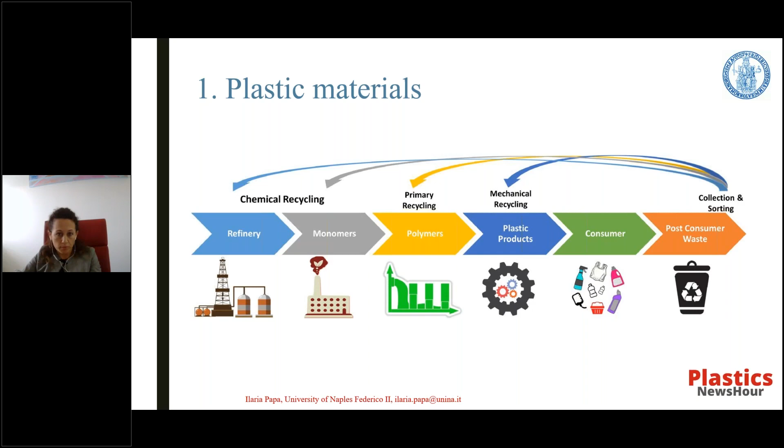Among the synthetic bio-based polymers, a special place is undoubtedly reserved for polylactic acid, or PLA, which in recent years has aroused the interest of a lot of researchers, becoming the subject of thousands of publications available in the literature. PLA, as you know, is one of the most widely used bioplastics, but its intrinsic characteristics, such as fragility, often limit its use in particularly demanding applications unless strategies such as mixing with other polymers or the inclusion of suitable additives are taken into consideration. With this approach, new environmentally sustainable materials with adequate performance, ensuring the reduction of environmental contamination associated with plastic, are produced by industry, but also by a lot of researchers.

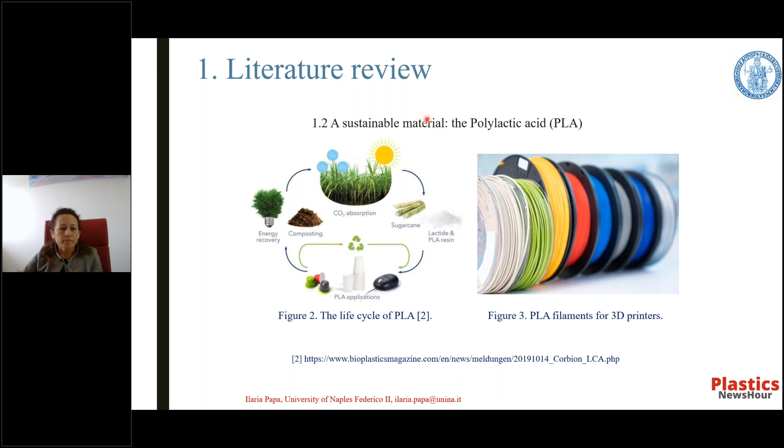The most common technologies to transform thermoplastic-based green composites on an industrial scale are extrusion, compression molding, and injection molding, and the success of these processes depends on perfect knowledge of the chemical and physical transformations undergone by the raw materials, and it often does not exclude the use of specific preliminary treatments or subsequent finishing processes of the parts produced, both costly in terms of time and expense, and which often result in the accumulation of production waste.

So the technological challenges that can arise from the use of alternative and more sustainable materials can be alleviated by a more rational use of the same, as well as by the elimination of additional post-treatment steps, thanks to the use of additive technology that you can see in the slide.

Among the latter, fused deposition modeling, or FDM, is the most common approach for processing thermoplastic formulations. In practice, the process involves a filament of a thermoplastic material, which is heated and passes through a nozzle to be deposited according, of course, to a preset code onto a plate, a different material that we can see in the second part of the presentation.

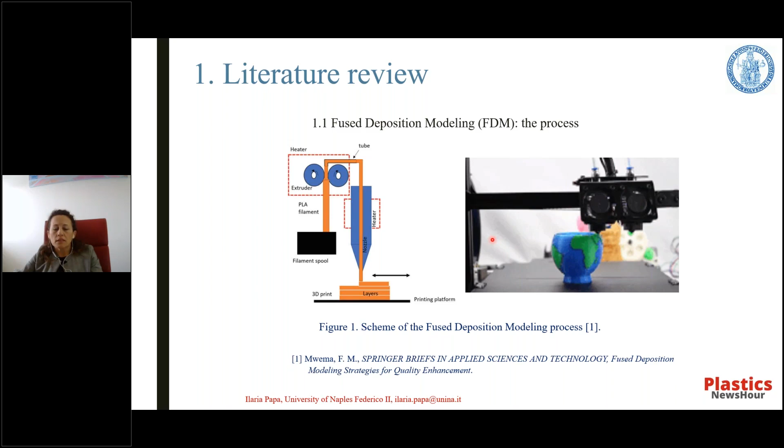So that said, taking into account that the raw materials for the production of filaments are still mainly of petrochemical origin, also in this case there is a growing interest in biocomposites, for example in the potential of alternative filaments based on green matrices, perhaps modified by the inclusion of natural additives, for example reinforcements, as I said before, such as vegetable fibers or agri-food waste. To overcome the inevitable environmental impact generated by traditional plastic waste, which often cannot be recycled, in recent decades a growing interest has also been directed to the study of bioplastic materials.

Of course, in literature, many studies have investigated the mechanical properties of PLA parts manufactured by different technologies, but also by FDM, given the high know-how on PLA, but only few studies have investigated the energy consumption during the FDM process. So a part of this talk is about understanding how to optimize the process parameters to obtain good mechanical properties of PLA parts while minimizing the energy consumption during the FDM process.

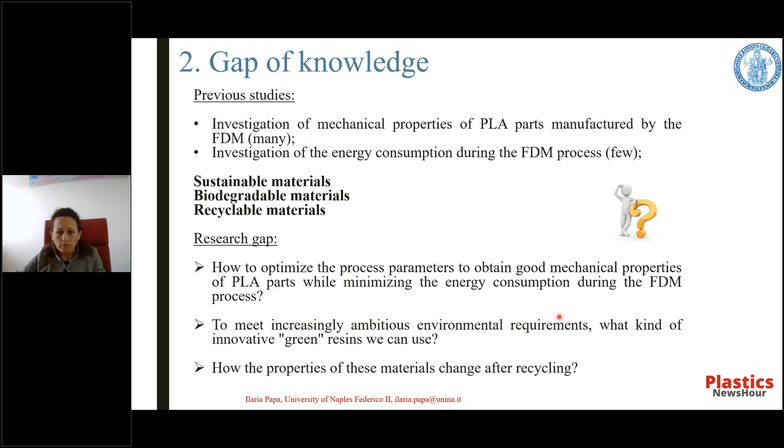Another part is about meeting increasingly ambitious environmental requirements, and so what kind of innovative green resin we can use and how the properties of these materials can change after recycling. So let's start to discuss sustainable materials and energy consumption.

Currently, the large use of 3D printers raises some issues when considering the environmental impact of home activities. A sustainability perspective suggests developing new ways of 3D printing parts in an energy-saving approach. In a previous research study, it was observed that the greatest contribution in terms of energy consumption is given by the heating of the plate and the continuous cycles to keep it warm. As a matter of fact, the power spent to heat the plate is at least 16% of the total power demanded by the machine.

And for the conventional plate made of steel, the thermal dispersion forces the system to keep the power on for the whole printing cycle, because the bed has difficulties reaching the target value, in particular when it is too high with respect to the room temperature. So in this scenario, the design of the plate was considered crucial to pursue energy consumption reduction in large-scale device use.

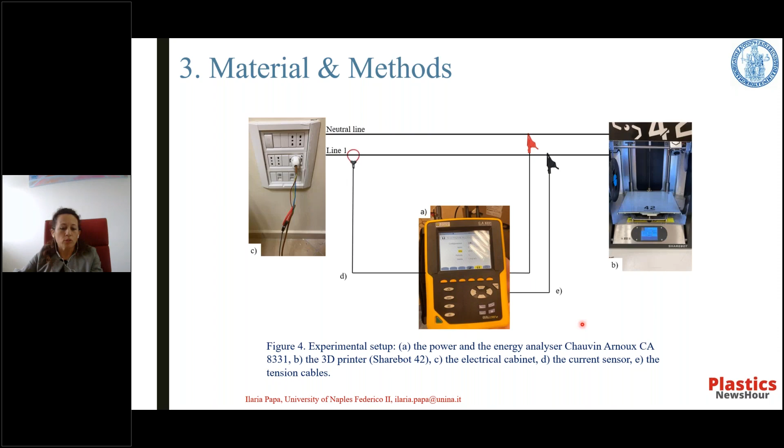An important thing that I have to say is that all the samples were printed using both an aluminum plate and a steel plate, to compare the results obtained and to study the effect on the mechanical properties, but also on the energy consumption.

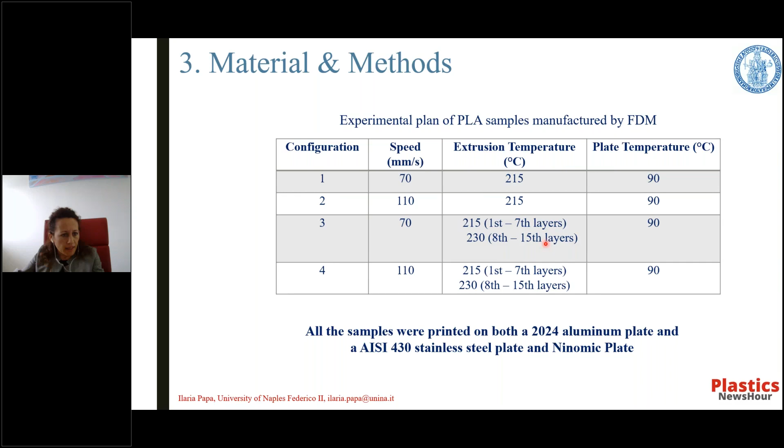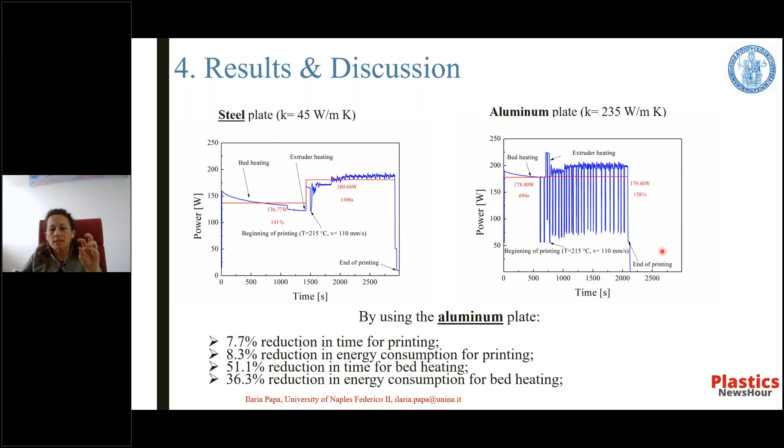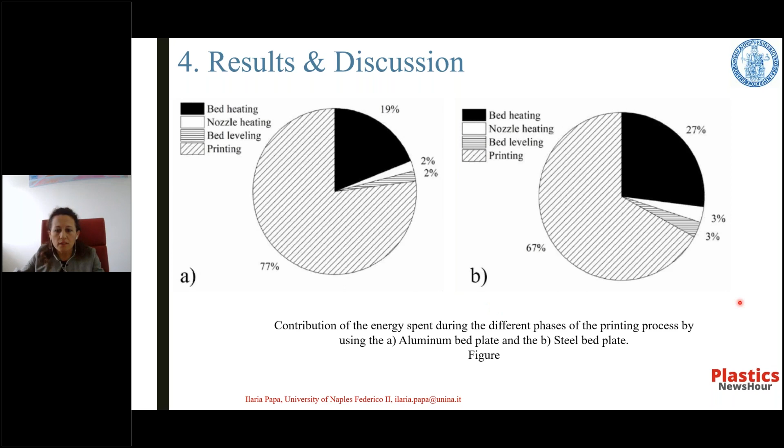Nevertheless, the printing time is independent from the capacity to reach and keep the target temperature, because it depends just on the nozzle speed. So the significant difference reported in the energy spent is even more important, since it means that although the duration of each phase doesn't change, the energy spent is improved. This is due to the numerous on-off heating cycles during the printing phase that we have seen in the previous graphs, where the signal goes up and down. This phenomenon indicates that the 3D printer continuously requires energy to maintain the steel plate at 90 degrees, differently from the aluminum plate, according to their different thermal properties.

Thus, in this part of the research, we have noted that it's better to use an aluminum plate for desktop 3D printers rather than steel plates, to reduce power and energy consumption of the FDM process, and this fact is related to the conductivity of the material, of course.

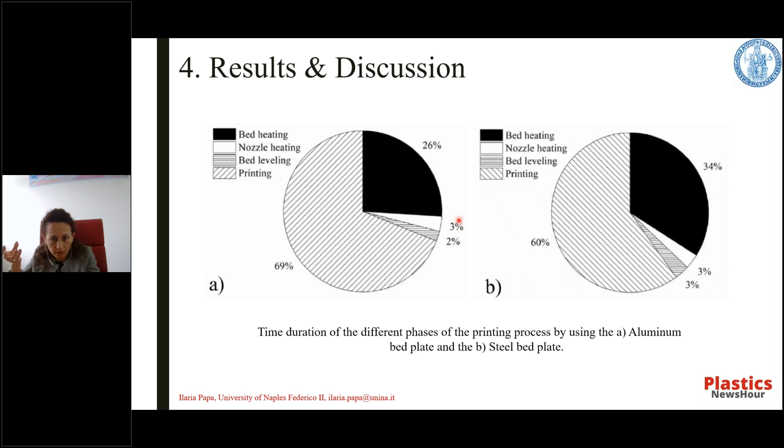From the values resulting from the energy consumption analysis, an analysis of the specific energy consumption, or SEC, was performed, which is widely used in the literature as a key sustainability performance indicator. In particular, in the FDM process, SEC represents the energy consumption for printing the mass unit. There exists a linear correlation between the SEC and the printing time, as expected, and so a new efficiency index, given by the ratio between UTS, the tensile strength of the printed component, and SEC, was evaluated. The index explains numerically how much tensile strength is obtained per unit of specific energy consumption. A higher value of this ratio indicates a better process efficiency for the printing strategy.

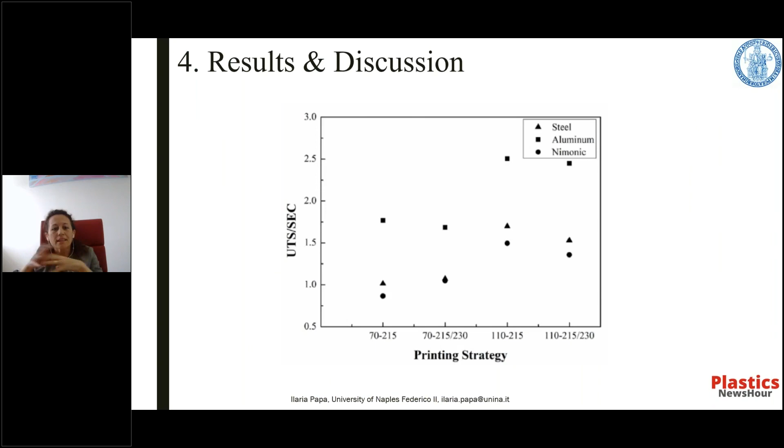The topic that we have discussed regards the technological and environmental sustainability of 3D printers, which is very important for industrial application in a sustainable perspective and energy efficiency.

So we have studied and evaluated, to define a correspondence between the main FDM process conditions and the efficiencies of this technology, evaluating its performance in terms of both quality and energy consumption.

The effect of different printing plates and different materials on the energy consumption in the FDM process correlated to the quality of the parts has been investigated. We can say that the average power during printing is lower using aluminum plates than steel plates, and this allows saving energy during the printing subphase of the FDM process.

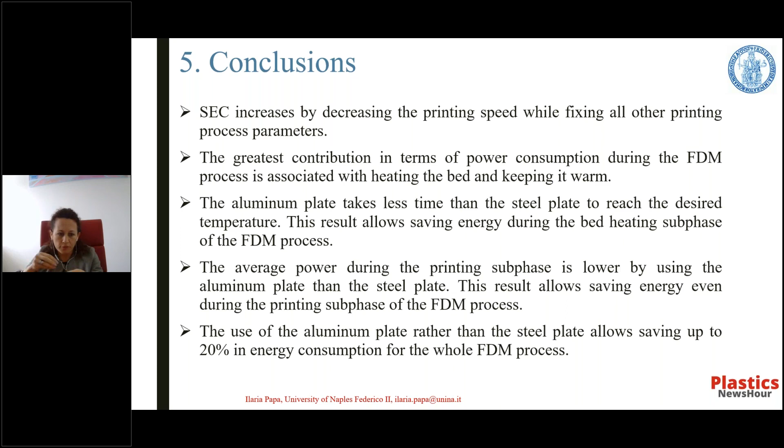So that finishes the first part of our discussion, but we can now start to discuss biodegradable and green materials.

As I said before, plastics that are natural or derived from renewable resources have attracted great attention, as they do not contribute to depletion of fossil resources and ensure reduced production of carbon dioxide during synthesis and transformation, therefore generating a lower environmental impact than conventional ones derived from petroleum.

In this context, with the aim to meet increasingly ambitious environmental requirements, special interest has been devoted to different green resins, many of which are already widespread even in different industrial fields.

Specifically, the implementation of dedicated chemical or physical modifications has allowed successfully overcoming new challenges, essentially due to expected lower thermal stability and also inferior mechanical performance with respect to conventional petrochemical polymers.

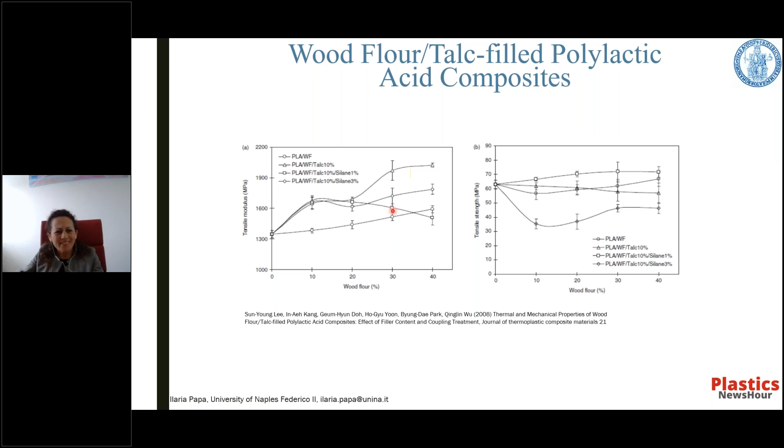Other researchers note that the cost of mixing PLA with synthetic macromolecules is high, and therefore lower cost options such as natural biopolymer materials, like bamboo flour (BF), are interesting. Bamboo flour is composed of a natural polymer that is also recyclable, and as a type of natural plant fiber, bamboo has low specific gravity and good mechanical properties, as well as low cost and abundance.

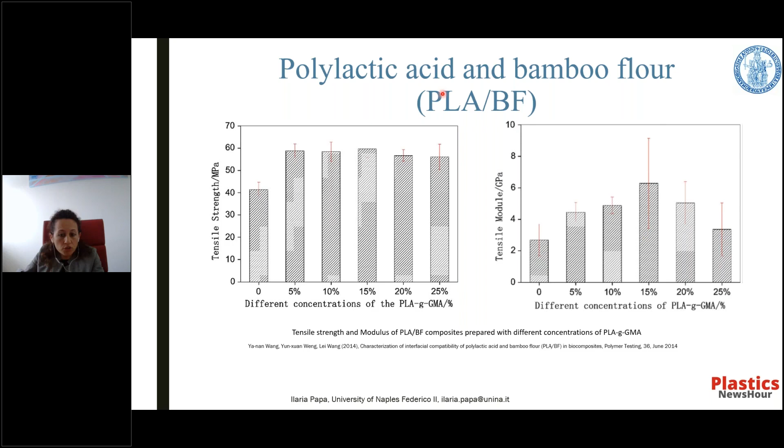In addition to using renewable biomass, other research has focused on natural fibers typical of local areas, as in the case of waste from olive milling, studied at Mira University of Bejaia in Algeria, in order to have a cheap, locally available component and avoid having to dispose of it by incineration.

The samples were formed by PLA and olive flour at 20% by weight. The compound first underwent an extrusion process and was pelleted. Finally, samples for mechanical testing were obtained by injection molding. Some samples were subjected to accelerated aging treatments to study the compound's characteristics at different phases of a product's usable life.

From DSC analysis, it was observed that pure PLA samples have a higher melting temperature after accelerated aging, given the embrittlement of the surface following the process, while for the compounds, whether alkaline treated or not, the temperature decreases.

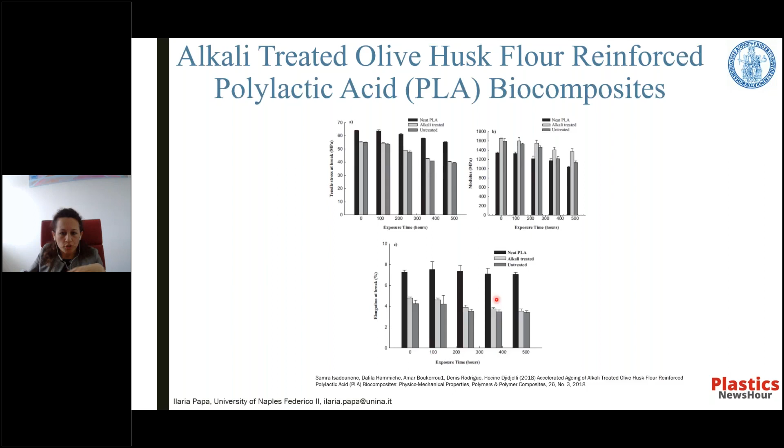We also want to show our own group's contribution, focused on a formulation based on commercial polylactic resin modified by inclusion of food flour waste up to 5% by weight. We compare the performance of samples obtained with conventional compression molding versus 3D printing, aiming to highlight the benefits of one process over the other. We printed and also obtained by compression molding specimens from different basic formulations, experimentally compared by thermal, mechanical, and morphological analysis.

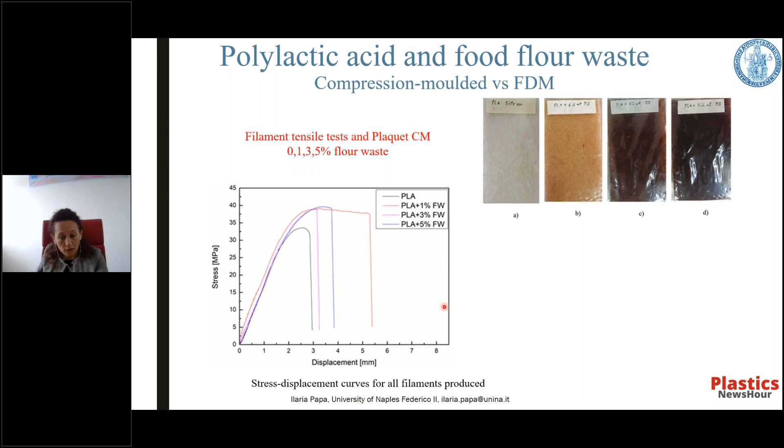Preliminary results emphasize that through compression molding (CM samples), it was possible to get homogeneous components, with the natural filler used as reinforcement improving mechanical performance. For the additive technology (3D samples), the samples obtained show lower mechanical behavior and underline technological issues with the process.

The main results on 3D printed specimens show that Young's modulus and tensile strength of the composite specimens are mainly worse than those of neat PLA, shown as the black line for both technologies in this graph. This variability could be due to the raster angle of deposition, equal to plus or minus 45 degrees.

During the printing process, the flour waste particles don't align along the printing orientation, as also demonstrated in other literature. On the other hand, the assembly of filaments in FDM cannot prevent holes between filaments or the superposing of filaments, reducing mechanical properties. This effect is expected to be greatly reduced for compression molding, as samples are subjected to high compaction pressures during production.

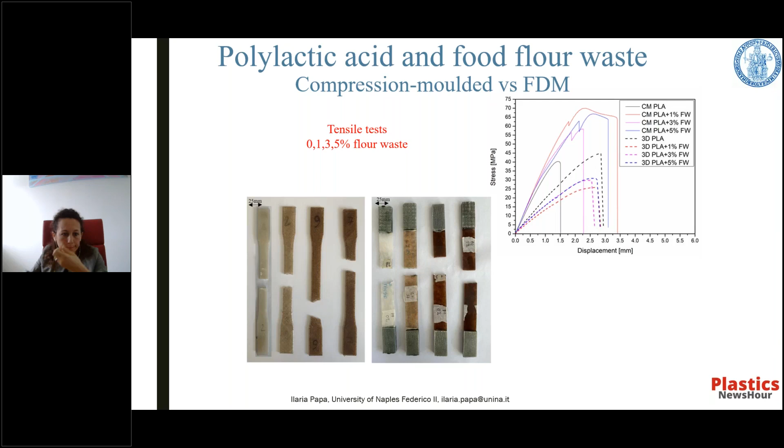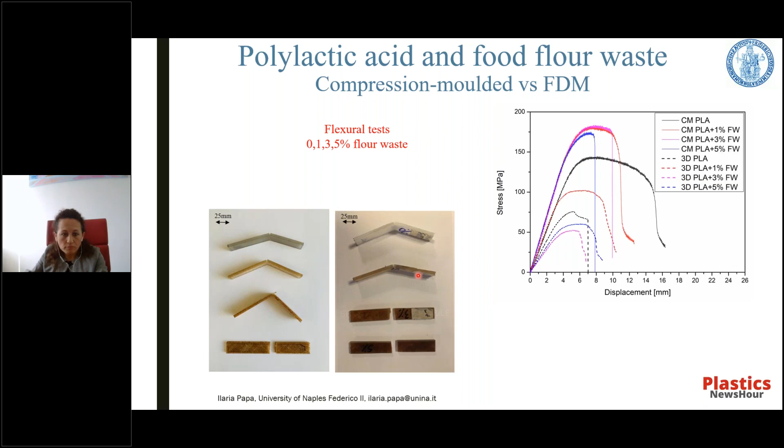The problems of biodegradability and recycling of the most commonly used plastic materials, up to now, have led to research focusing on the identification of new types of biodegradable plastic, such as PLA. We remind that, of course, biodegradability means the ability of a material to be degraded in part or completely by microbial species present in the environment when found in particular environmental conditions without releasing toxic products.

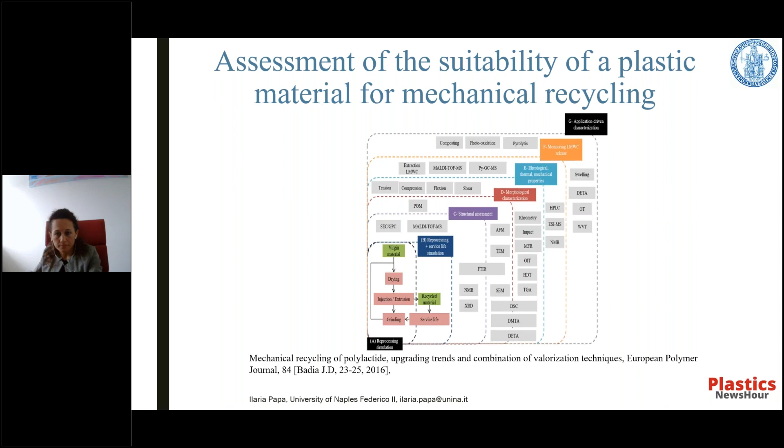So PLA is currently used to make a large number of disposable consumer products, such as cutlery or tableware, for cups, for kitchen appliances, computers and portable devices, for compostable bags, and also for food packaging. Furthermore, PLA is one of the most used materials also for filaments in the world for 3D printing, and it's also used in the automotive sector for mats, panels, and covers in 3D printing, thanks to its low melting temperature.

The mechanical recycling of PLA was the subject of several studies conducted in the laboratory, during which the recycled material was analyzed from a morphological, structural, rheological, and mechanical point of view, in terms of the release of low molecular weight compounds, and through specific analysis techniques for the possible fit of application of PLA and also of the recycled PLA, such as mass transport or its use based on the dielectric properties that characterize it.

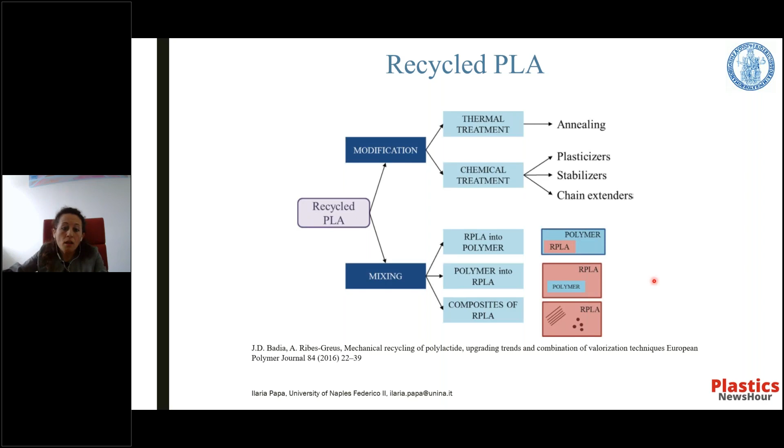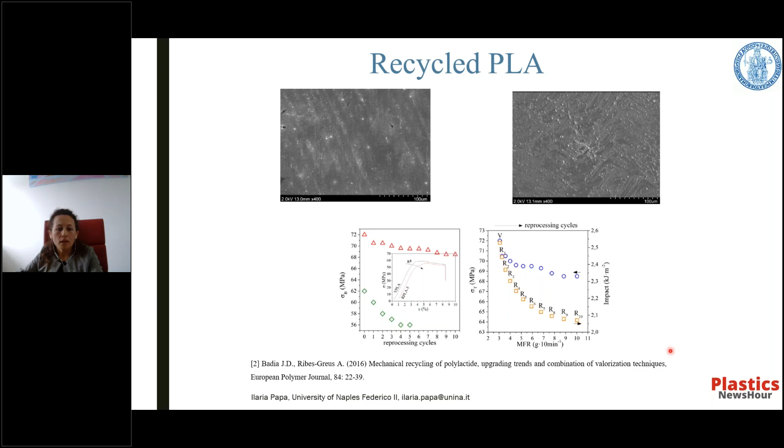Also, my working group undertook this study. In particular, we have evaluated the effect of adding a chain extender, that is a peroxide, to PLA subjected to various mechanical recycling. So we have the neat PLA materials recycled 1 time, 2 times, 3 times, 4 times, and also the additivated ones recycled 1 time, 2 times, 3 times, and 4 times. And in this case, we have recycled the PLA filament and reutilized it in 3D printing, and realized also the additivated filament for 3D printing, recycled 4 times.

Also in this case, for the additive manufacturing technology, we can see a decrease of all mechanical features, as we can see in this slide, as the number of recycling cycles increases. In particular, we have a lower value obtained by the additivated ones, but a higher strain indicates less propensity to damage of these components, and of course by the slope of the line we can see that the modulus and the mechanical features decrease as the number of recycle operations increases, and this happens for both neat and additivated PLA.